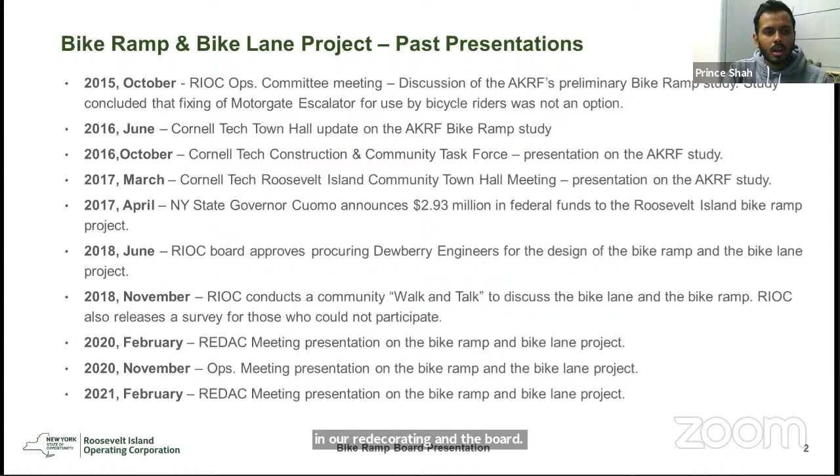This is the Walk and Talk that we had done. I try to focus on every project by zooming out and zooming in. Zooming in, what's RIOC doing, or what is Roosevelt Island doing? But zooming out, what is New York City doing, and what are all our 5 boroughs doing?

It's very important to note that with the New York City DOT's Green Wave plan, there's already a plan to expand the bike lanes everywhere around us, around Roosevelt Island. There's an expansion of the network of bike lanes in Astoria, in Brooklyn, even in the Bronx. I don't think the Bronx portion is part of the Green Wave plan, but it all connects eventually to Roosevelt Island. In 2020, Mayor de Blasio announced plans to construct 26.9 miles of bike lane.

In 2021, recently, the mayor announced Bridges for the People to connect and create bike lanes on the Brooklyn and Queensborough Bridge. So around us, zooming out, all 5 boroughs are concentrating on bike lanes, and more so making the bike lane safer, not just creating a lane that isn't designed. All of these are designed lanes.

What I don't mention here, and I think what's evident since last year in the pandemic, is that biking activities in every borough have increased. You might have heard how you couldn't find helmets, you couldn't even find bikes last year.

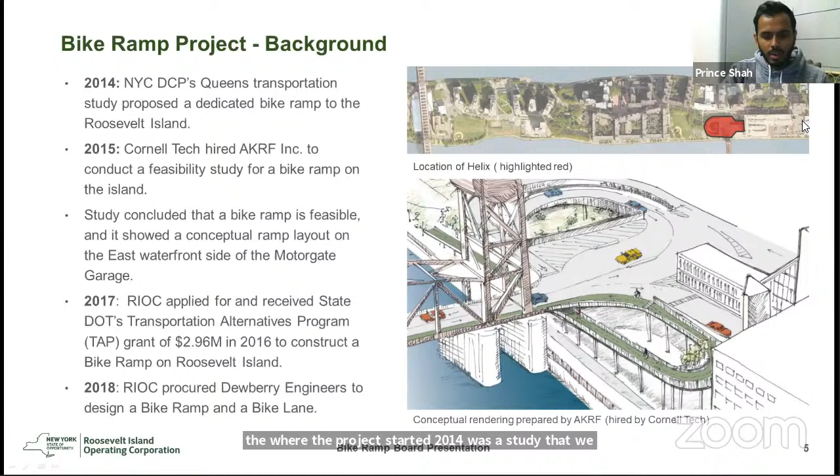So that being said, I'm going to go through the background quickly. I've talked about where the project started: 2014 was a study, then we did a feasibility study, and then we hired Dewberry engineers for the project. Budget is 4 million: 2.96 comes from the TAP grant, and the RIOC match is 1.04 million. The goal of the project is, again, a safe bike ramp.

It has to meet all the DOT guidelines. It has to meet the AASHTO guidelines. It has to create a safe connection that connects the Roosevelt Island Bridge, connects the bike lane, and keeps bicyclists away from the Main Street corridor of vehicular activities. On top of all of this, it has to provide—not so much the bike ramp, but the bike lane, which I'll talk about briefly—a safe pedestrian walkway as well.

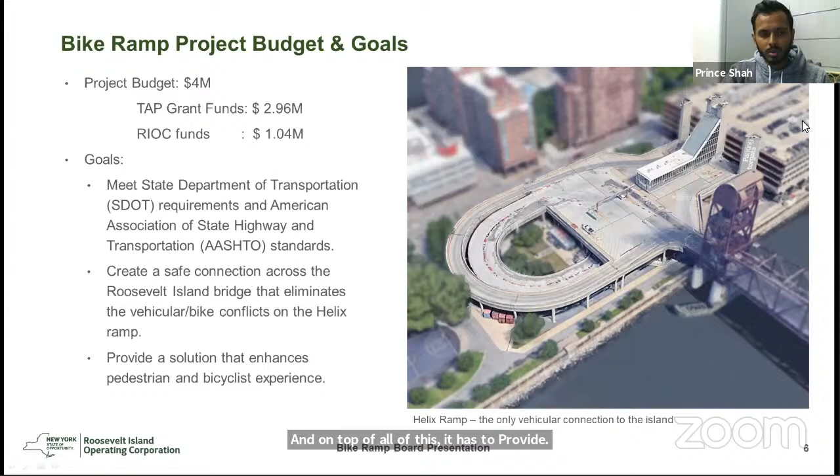Just looking at the bike ramp, we've done a couple of configuration studies, looked at the AKRF study, and that's kind of where we ended up. I'll fly through some of them, but looking at the AKRF study for the bike ramp, we realized AKRF had done a conceptual study—they didn't have actual surveys. That was not their scope of work. Their scope was not to survey the ramp or the area, but to look conceptually at what can fit in this zone, and whether it could meet the guidelines.

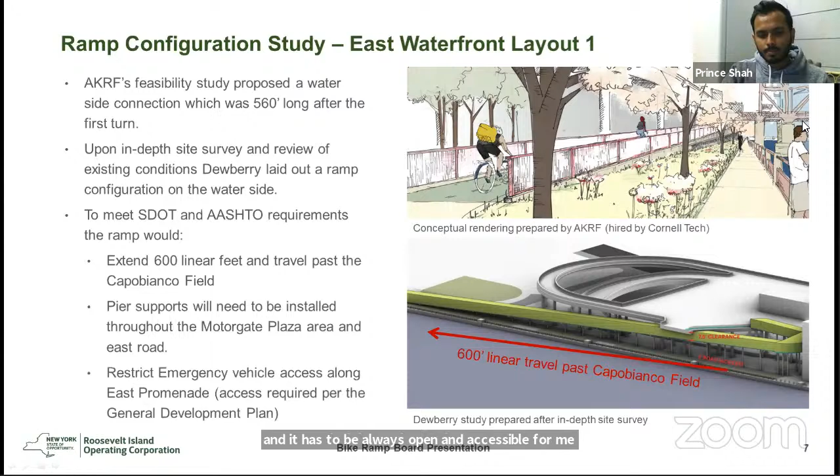What they had done—when we did our own surveys on site, we looked at the geometric dimensions of the ramp. We received some as-built drawings from the original designer of the ramp. We realized AKRF's layout did not work and did not meet some of the clearances. On top of that, it took out a portion of our East Promenade, which has to be used for emergency service and must always be open and accessible. So we looked at a couple other studies. Most of these either did not meet the AASHTO guidelines or did not meet our funding guidelines, which required us to create a bike ramp.

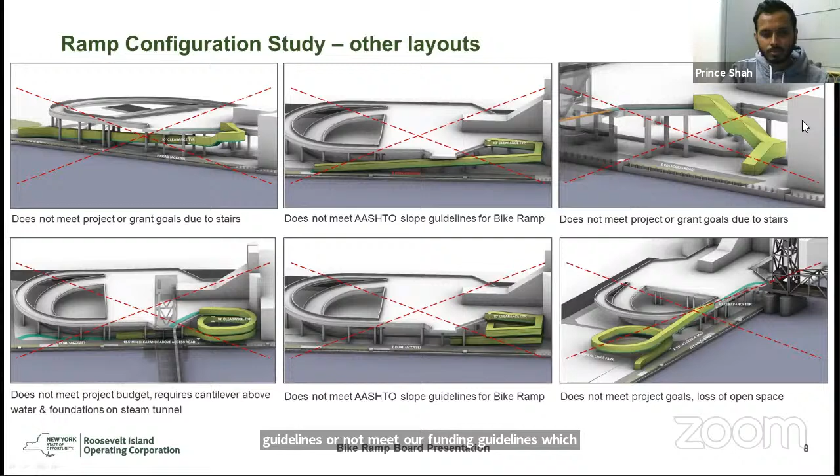So we looked at a couple other studies. One of the studies was creating a bike ramp on East Waterfront. This layout of the bike ramp was taking away from a public space, which is the public plaza space, the stairs right here, and we were going to put a bike ramp in that area.

Zooming out again, looking at the larger capital goals for the island and this area, we realized that if we put a bike ramp here, A, it creates a dark, dingy space. B, it restricts the area from any future development. You take out this public space, put in this concrete bike ramp structure, and it'll make the Motorgate atrium, used for arts and other public activities, unusable.

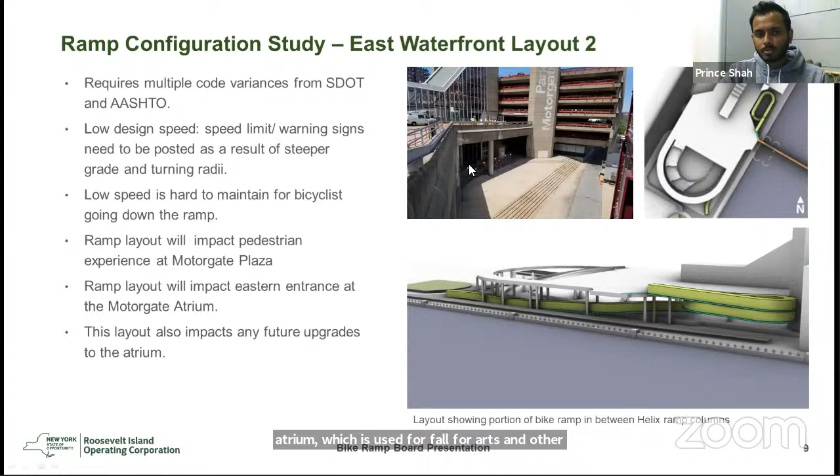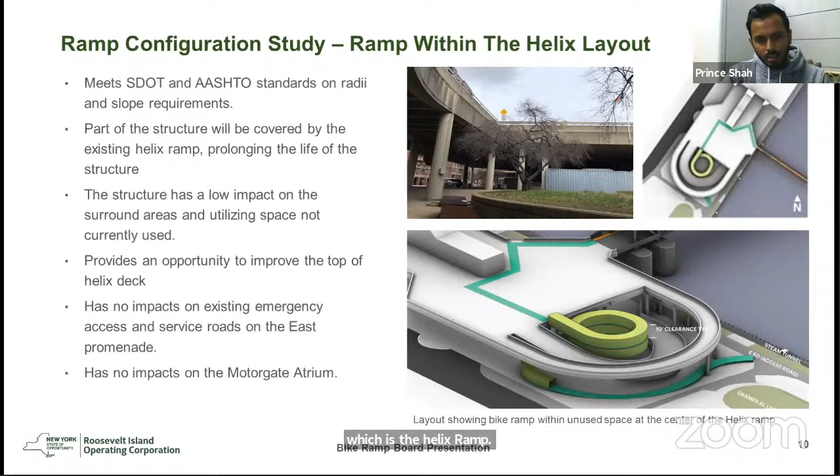So we moved on from that layout, and there were a lot of further studies. I'm just trying to be brief here. We looked at this layout, the Helix ramp, a ramp within the Helix vehicular bridge. Looking at this Helix within a Helix idea, what's evident is this layout will not affect our Motorgate atrium, it will not affect the public space, and it will only affect the areas marked here in blue.

Eventually, you'll see in further slides, there's a net gain of public space. There is more usable public space than there would have been with the ramp on the East Promenade.

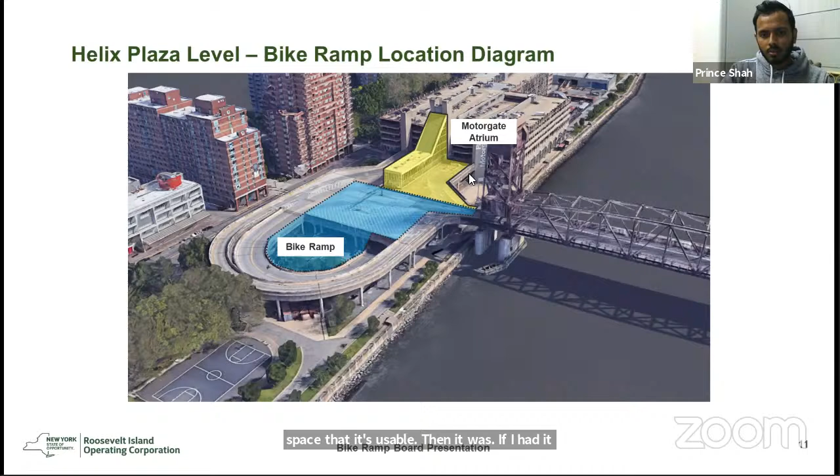Going back to the ground level, you'll see that the area of the Helix within Helix is within the blue zone, away from the usable public space of the Farmers Market, the Motorgate atrium, and the area that's very active on Saturdays during Farmers Market, and even on weekdays when people are going into the garage or to Food Town, etc.

Looking at this layout of existing conditions at the ground level, we have this unused space currently used as a RIOC storage area with storage containers, and also used for parking during blizzards when we ask people to get off the main street and park within this area.

There are also some crabapple trees within this area that have significant root rot and are near the end of their life cycle. They're at the edge of the retaining wall that needs to be removed in order to have the columns of the new bike ramp.

We looked at transplanting these trees, but because of their age, they're almost guaranteed not to survive. So instead, we're planting six other trees within this area to make it more accessible to the public. You'll see that in the next slide.

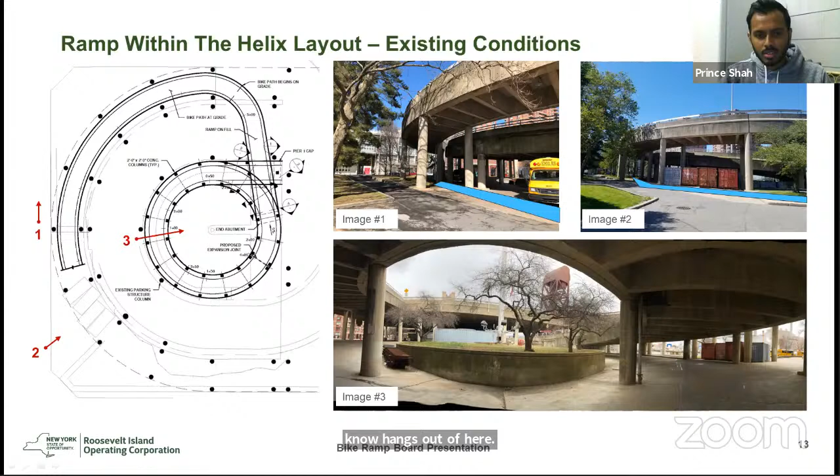We see this area as a plus to the project, the community, and the green space of the island, where we're expanding the green space. We're introducing pink flowering trees that will be healthy and last longer. We're making sure the culture of the island's cherry blossom festival, the pink flowering trees, is still intact, and you'll see that rhythm continue in the next couple of slides.

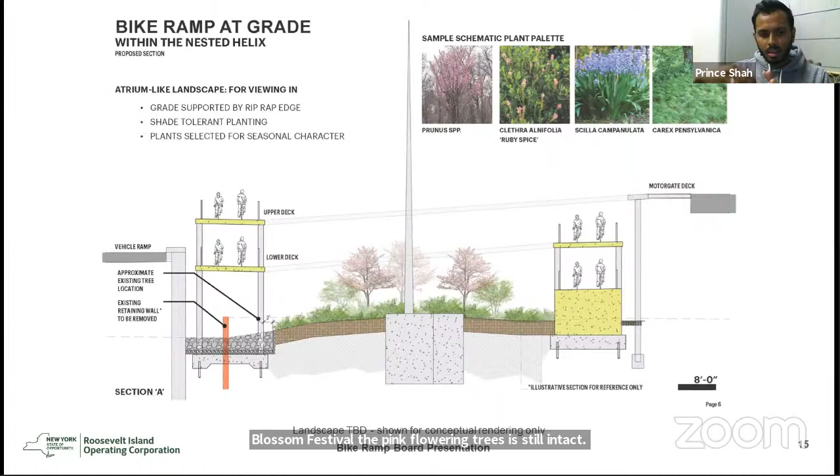Now zooming out again, you see there's a Roosevelt Island Bridge where Paul and some other community members are actively working on getting a bike lane, or a safer bike lane. You'll see that the bike lane, as it comes towards Roosevelt Island Bridge, turns into this dedicated bike ramp, really reconnecting to the idea of the bridge connection, where Paul and other community members are creating that safer bridge connection.

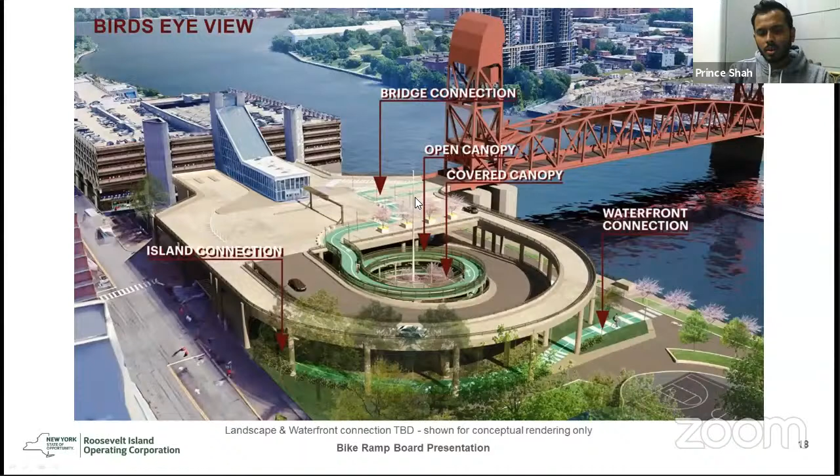Past the Roosevelt Island Bridge, this project aims to create a safer bike lane connection on the bridge plaza itself, the Helix Plaza. You'll see the juxtaposition of open canopy versus covered canopy. As you're coming onto the ramp and going down, I'll walk you through that journey - you'll see the connection between biking under a canopy versus looking at these green trees, the water, the future bike lane, and really reconnecting to the island and understanding its culture as you're going in.

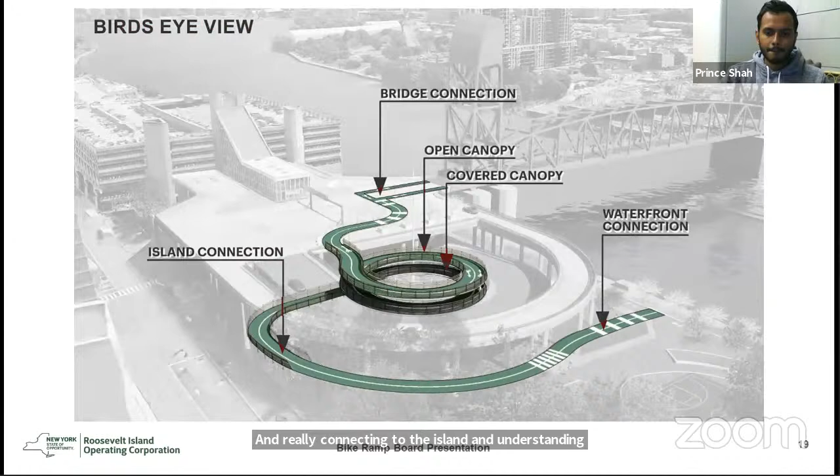So now, walking you through the journey of the project. On the plaza level, we have the dedicated, marked bike lane that leads into the bike ramp. For the purposes of illustration, we're not showing the stop signs and bike-only or bike-turn-left signs, but there is another traffic study performed by the traffic engineers, and there is a whole traffic layout.

Something to note, this is a DOT project, it has to be DOT approved. So there are DOT standard safety precautions and measures on the whole project.

As the biker approaches the bridge, there'll be a stop sign that will stop them, and there will be rumble strips along the way as the biker goes towards the bridge. So they won't be able to speed down towards the bridge or speed out of the bridge and not be able to stop. The rumble strips really calm the traffic and work towards slowing down the biker as they come towards the stop.

As you go down the ramp, you'll see connections of the cherry trees, or the pink flowering trees. Our idea and goal was to really create a softer edge as you're coming onto the Helix.

This is our first introduction of the island, right? There's an introduction at the tram, which is amazing. There's an introduction at the ferry. There's an introduction at the subway. But for vehicular traffic, for bike traffic, for pedestrian traffic coming from Long Island City, this is our introduction. So this project aims to start really recreating and rebuilding the introduction to the island as you're approaching it onto the bridge.

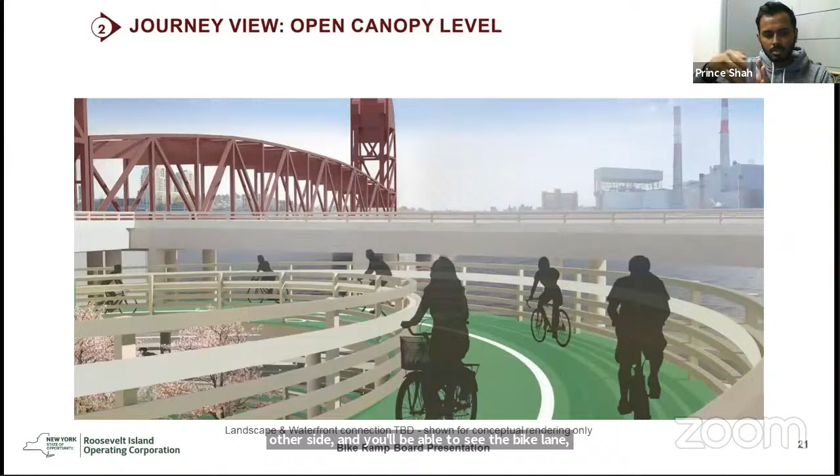Going down, you're going at a slower rate, and you're really connecting to all these landscape elements of the island. As you come down, you will see railings on either side that really stop the bikers from going out of the bike lane or bike ramp and off to the sides. There's also a landscape edge within that zone to create a softer edge and also a safer lane.

As you come down on the ramp and approach this area, the rest of the bike ramp turns into essentially the bike lane, and it is all at grade level. You'll see that all of this is almost at grade level, and there are multiple rumble strips to ensure that you slow down and you're not just spinning out of the bike ramp and onto the bike lane.

So you're really slowing down, and there's a slight descent as you approach the bike lane, with a nice, soft curve that brings you onto the bike lane.

From the outside, if you're walking on the sidewalk, you see that there's a minimal impact of this bike ramp onto the island and onto the quality of the island. On top of that, we're actually adding a lot of green space, the green space I was talking about before.

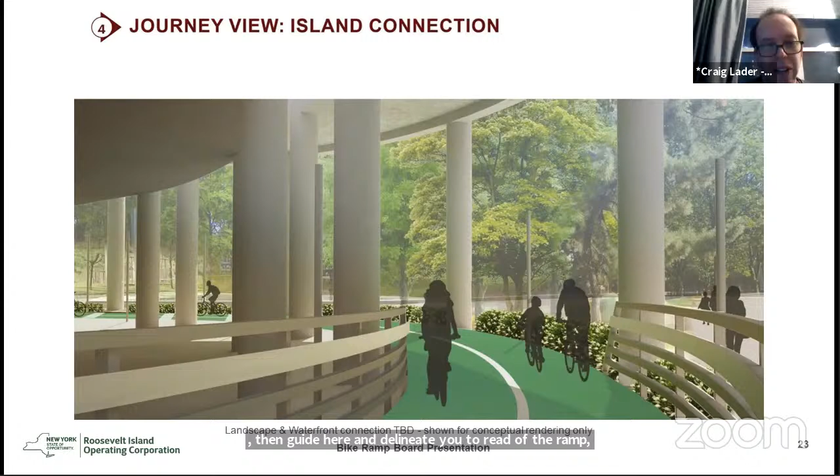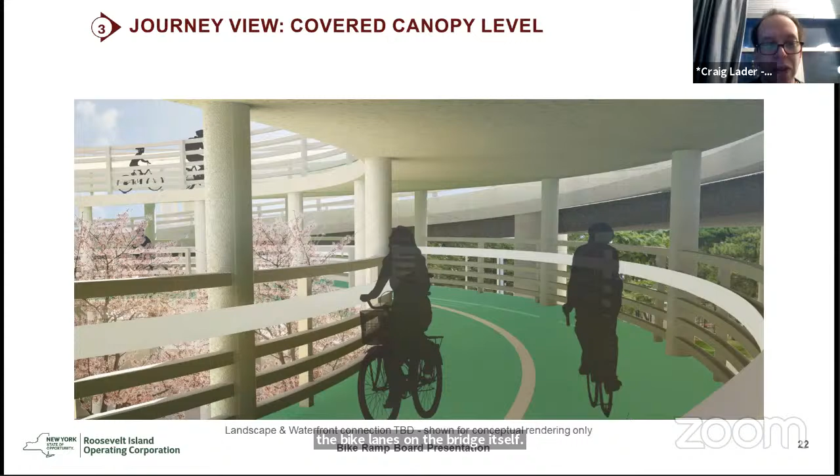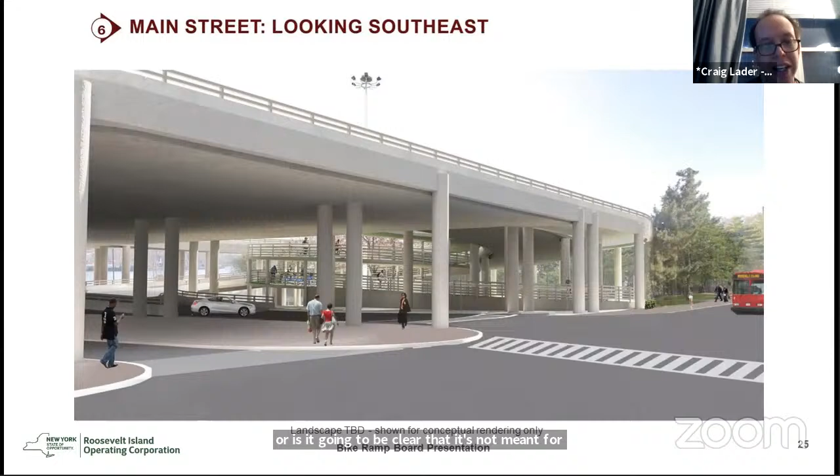All right, great. Yeah, I was just thinking how at night it could be particularly dark under there, so that sounds good. And just, from a network connectivity standpoint, I know there's progress being made on the bike lanes on the bridge itself. I assume it's just a matter of how the paint directs people into the right lanes and makes sure pedestrians are separated from cyclists, not on the ramp, but on the bridge, because pedestrians are... is it going to be clear that it's not meant for pedestrians? Because I can't imagine it would be safe for a pedestrian who doesn't see a bike coming down the ramp, circling around.

Yeah, let me see if it shows up in this rendering. One of the goals of the project was to really clarify the pedestrian access way onto the island. So right now, the pedestrian way is actually through an entrance here. Before working at RIOC, I'd been to the island for a very long time—I used to hang out here in high school—and I never knew there was an entranceway into the Motorgate, because I never saw it.

There's no proper signage there, no proper pathway leading onto the atrium. So this project kind of goes hand in hand with other capital projects we're currently looking at, in terms of how we can improve access and visibility going into the atrium. So part of this project involves improving all the pathways. There are actually new pathways that lead you onto this area, new curb cuts, new access ways to ensure you actually see there's an entranceway here, and then there's an elevator inside that takes you down.

And there will be signage on this side that shows you this is for bicycles only, and this is for cars and such. All right, great.

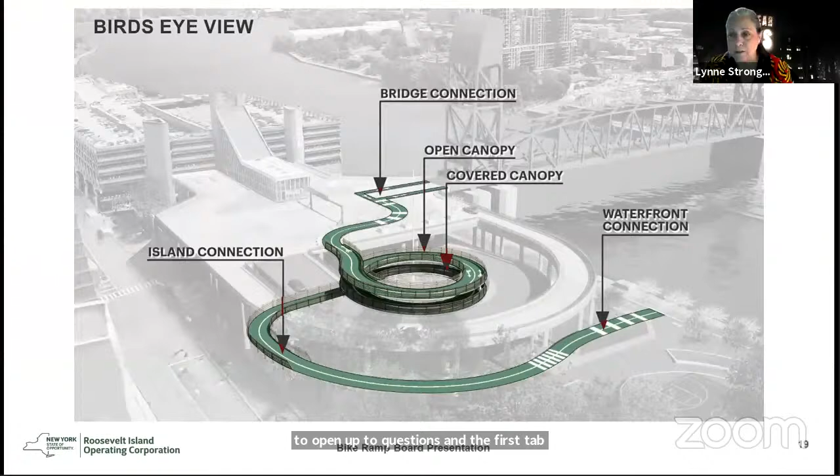Great, thank you so much for this presentation—I thought it was very helpful. I have a quick question and then maybe one or two that aren't as quick. When you say DOT approval, am I right to assume that's the state DOT?

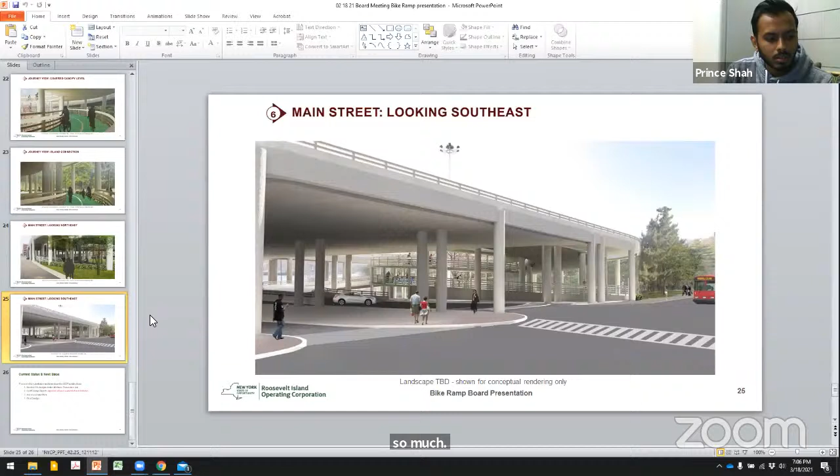Yes. Great. And then do you mind going to slide 25, please? Yep. So am I correct that the ramp is hitting where the current Citi Bike stand is? And if so...

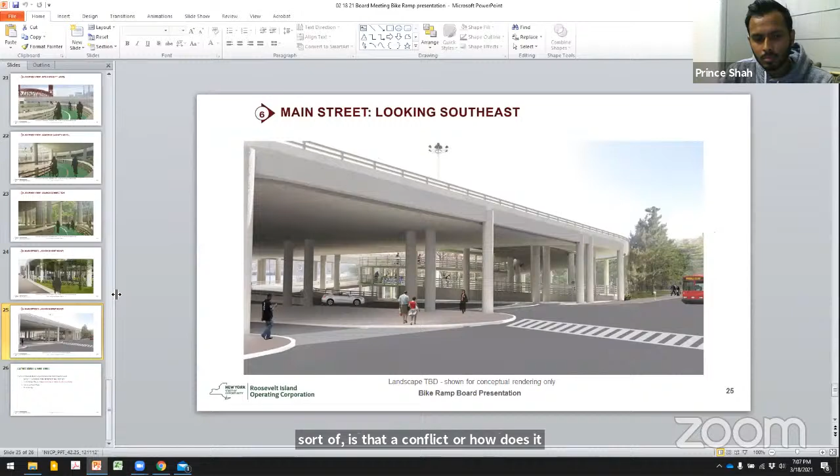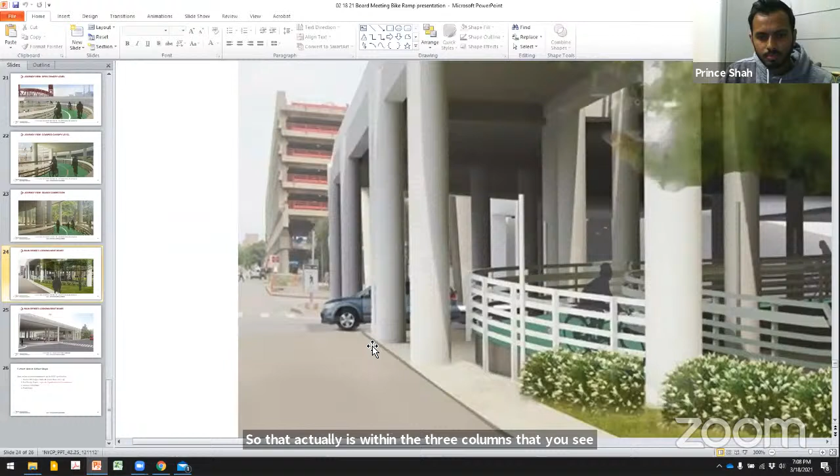How does that relate spatially to where the Citi Bike rack is? When we installed the Citi Bike in that area, we discussed with Citi Bike that this bike ramp layout was one of the options we were exploring. At that time we had only developed a schematic like what you see here. So they are aware this area does impact Citi Bike, but there's still enough space. Let me see—where's the sidewalk? There, okay. So there is still space behind the bike ramp that is accessible. The Citi Bike space is between this column, column one, and I think column three in the back, so it's within these three columns. It doesn't come past the inside column, so there's still space for Citi Bike here.

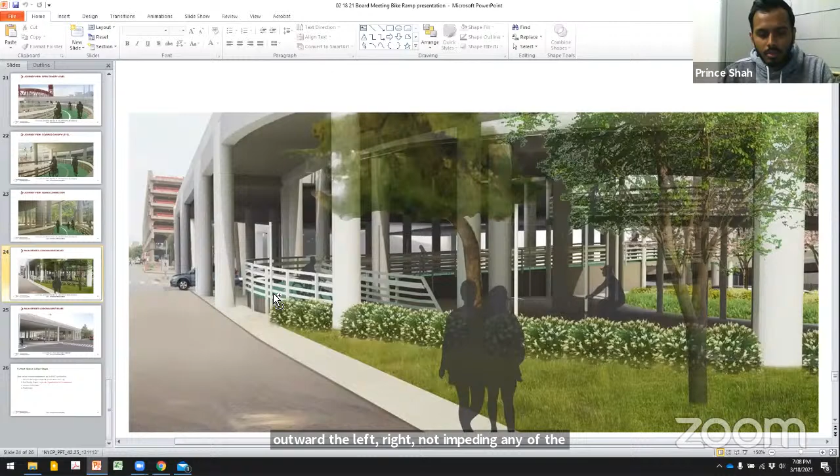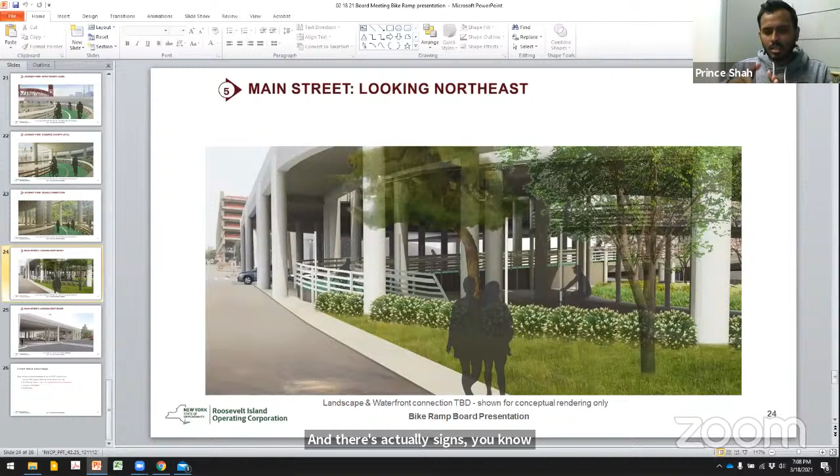We had discussed this with Citi Bike, so they know that if they need to make adjustments, they're aware they might have to move the Citi Bike inward or outward, or left or right, without impeding any sidewalk space. The reason for having the Citi Bike where it is now was to create this culture where you can take the Citi Bike—there are signs pointing toward this pathway right now to bring bikers toward the east promenade. Does that clarify the answer? Sorry, I kind of mumbled. Yeah, it does clarify somewhat, but do I take from your answer that it's possible the Citi Bike stand could get moved into Main Street, into the actual street, if it were moved?

No, inward or outward within the same area inside the sidewalk, not onto Main Street or off the sidewalk—they'll still be within the same zone. When I say inward and outward, I mean really 10 or 15 feet inside, or left or right, not onto the sidewalk or onto the street.

Because the last thing we want to do is take away the street in that area. It's a very busy space.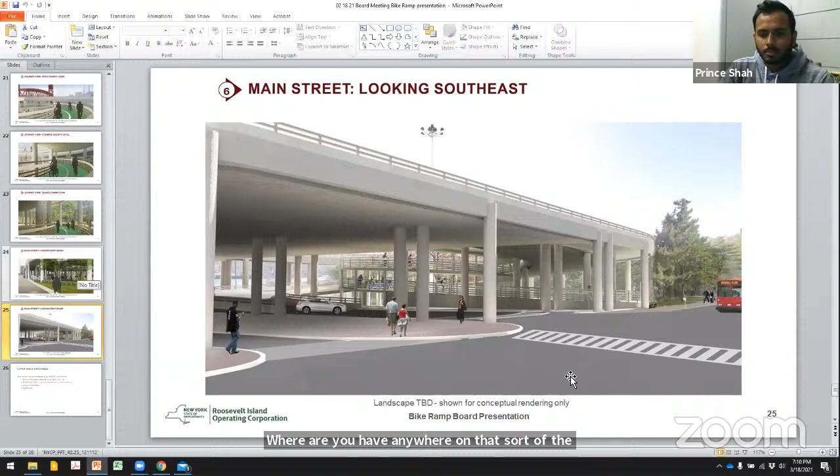That was going to be my last question, forgive me if you covered it in the presentation: with respect to adding a bike lane on Main Street, I saw your survey responses. Where are you on that discussion? This ramp leads right to Main Street, which could arguably make it a good candidate for a bike lane, though I know it would be a hot topic for debate. Is that something RIOC is contemplating? Yes, what we are contemplating, and the goal of this project, is to take bikes away from Main Street, not onto Main Street.

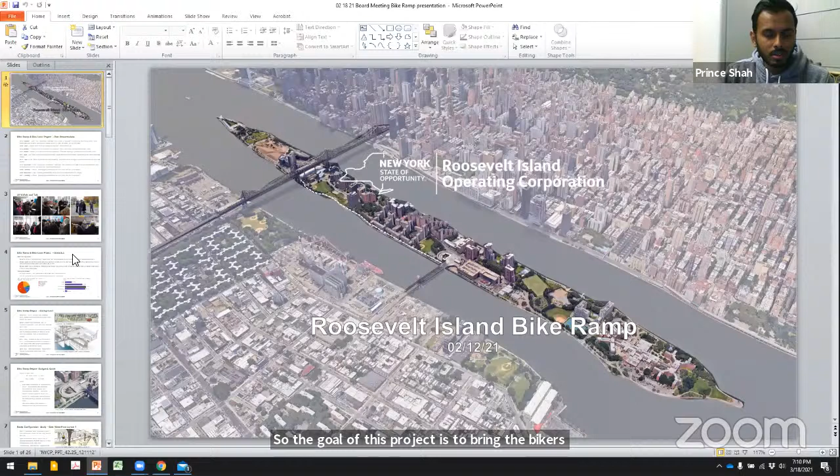So what you will see here is our East Promenade, and this is the West Promenade facing Manhattan, and then we have Main Street on the island. The goal of the project is to create an East Promenade bike lane corridor away from Main Street. We want to make sure bikers come onto the East Promenade, where there's a wider space for bikers to ride and pedestrians to walk. So you'll see bikers come onto the East Promenade and not onto Main Street, which is here. This is in line with the 2014 Queens Transportation Study, which also suggested bringing the bike lane onto the East Promenade.

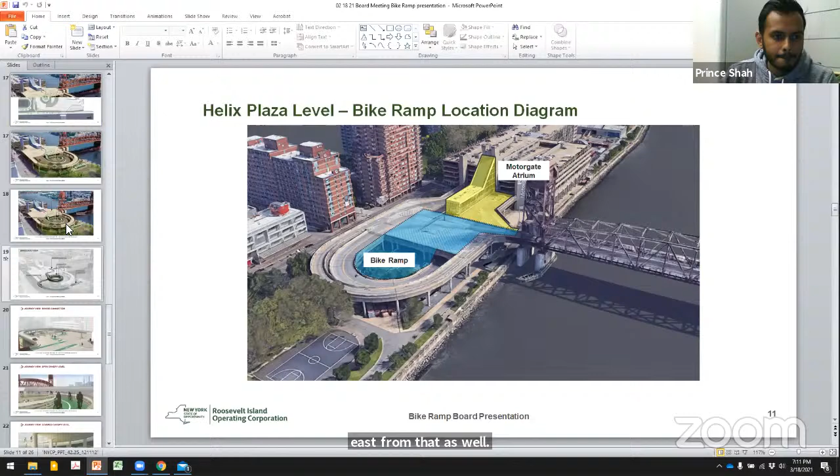Could I see the visual of how the bike ramp connects to guide people to the East Promenade? As you're coming down the bike ramp, you're slowed down by rumble strips, and this rendering almost stops where the bike ramp ends, but where it ends is where the bike lane begins. So this pathway turns into the bike lane.

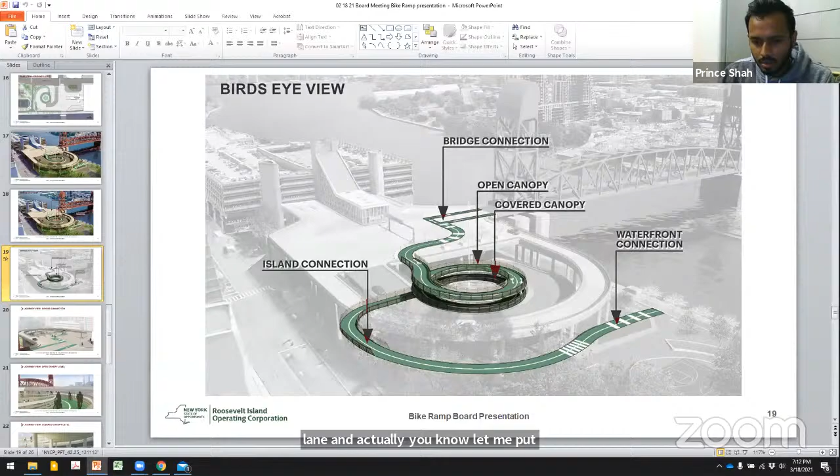There's another project too. If you go to RIOC's website and look at the REDAC February 12 meeting, it's almost an hour or two-hour presentation that talks about the whole project and how it fits into the capital goals of the agency, with the goal being to connect to every public space on the island. You'll see the bike lane. Let me put up that graphic quickly, give me a second.

While you're pulling that up, I don't know if you said what the timeline is for when you'd like this completed. I know with DOT approval that makes it hard to say, but do you have a rough idea of the timeline?

Yes, construction will begin in fall of 2022 for the bike ramp and bike lane, and the project is expected to take 2 years, so it will be constructed by 2024. I'll say that's a little disappointing, 2 years, but I know that's probably not in your control. Yeah, but it's DOT - when we found out the timeline of how long the project takes to get approved, it was kind of shocking to me how long it takes. But that's because we have federal funding and state review and such. Let me just show you this graphic, and this will help.

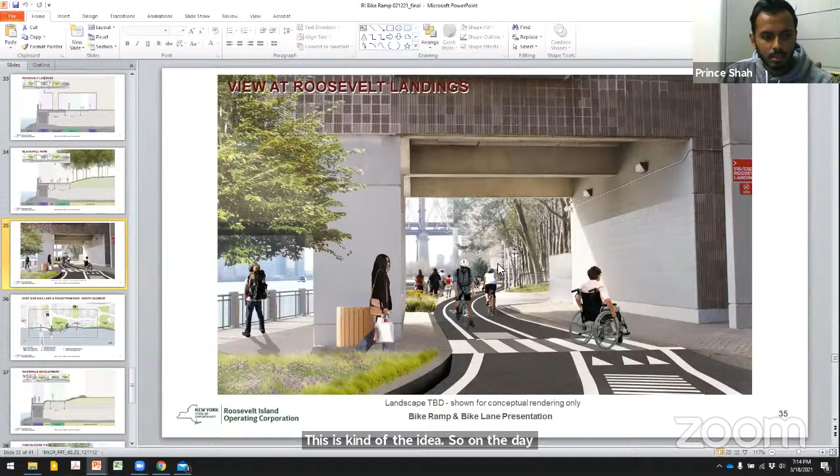Sure, I think everyone here might have other questions too. You'll see the bike ramp on the right side of the screen brings you onto the bike lane, and the bike lane runs along the East Promenade. The goal is to create a pedestrian path so you can take your bike and walk it to Main Street along the breezeways on Roosevelt Landings or any public crossways, but the rest is the clear bike lane. This full presentation is on the website, but to show quick graphics - there'll be a bike lane on the promenade connecting you to the rest of the East Promenade, and eventually to the road leading to South Point Park and Four Freedoms Park.

Great, thank you, I think this is a really important and good idea. Thanks for the presentation.

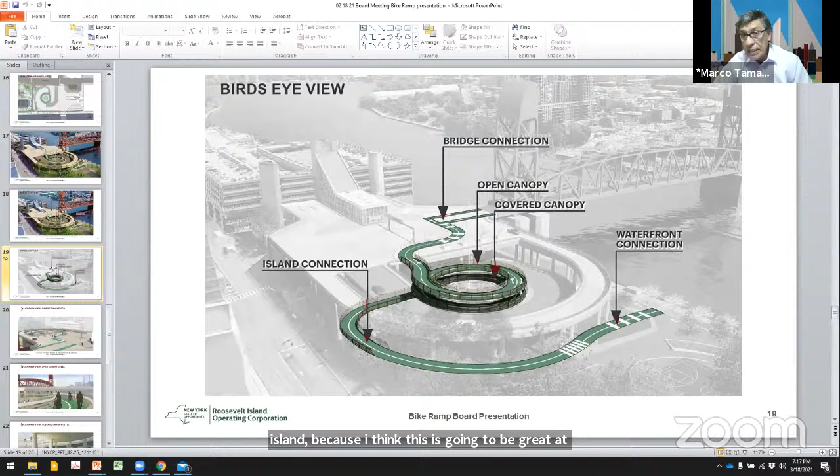I think they deserve it, we have to promote exercise. I think it's great, the whole system is great. The whole island offers these opportunities, and we have to take advantage of that. The only thing I'm going to say is thank you, thank you. You did a wonderful job, and I hope that you include more projection in the island, because I think this is one of the great assets that we can have.

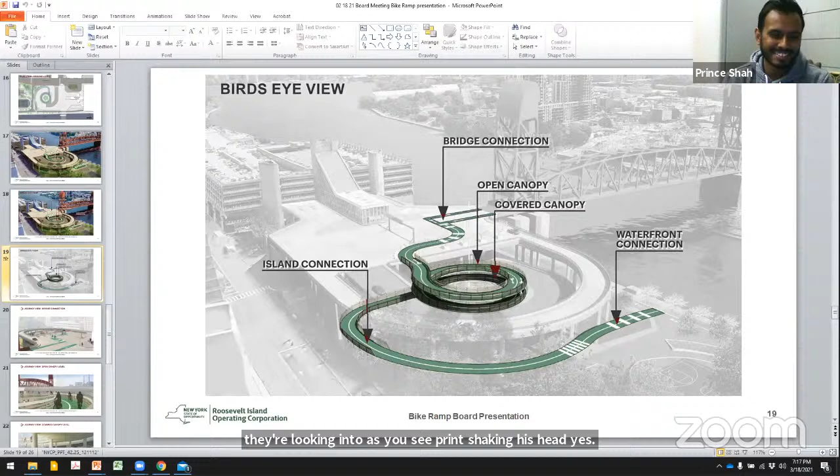Can you hear me? Yes. Oh, okay, great. Thank you, Lynn. I have a couple of comments and also a couple of questions.

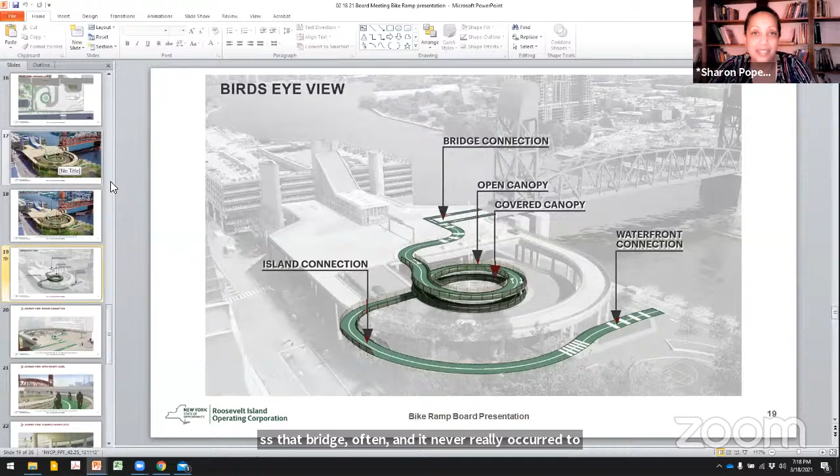First of all, Paul Krikler, thank you, thank you, thank you, and everyone else who is involved in trying to have a flat surface on the Roosevelt Island Bridge. I'm in awe of your efforts, I really appreciate it a great deal. I have biked across that bridge often, and it never really occurred to me, I'll be perfectly honest with you, to move in the direction that you have in trying to get something flat on the surface of the Roosevelt Island Bridge. I just didn't think there was anything that could be done. So I really want to tell you that I'm watching you, I'm praying for your success, and thank you so much for your efforts.

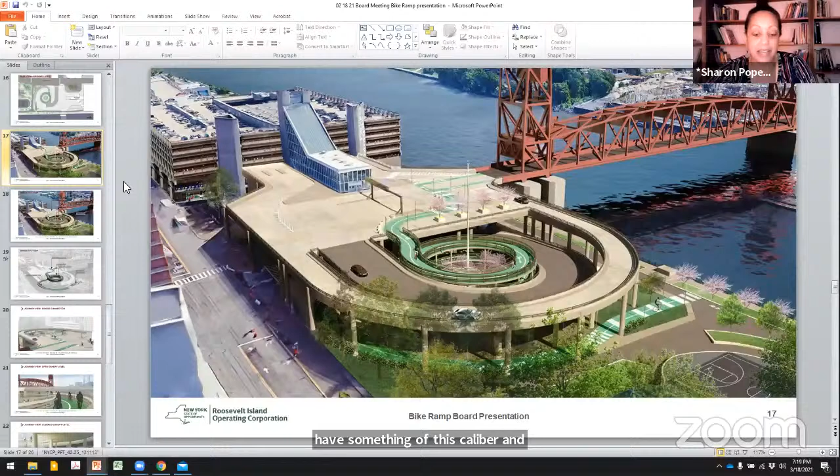And to Jane Swanson, Cornell Tech, as well as RIAC, this is a wonderful, wonderful presentation. I just cannot believe that Roosevelt Island is going to have something of this caliber. I'd like to echo and repeat Marco's comments and Billy's comments as well. This is absolutely a beautiful presentation, visually beautiful. I love the minimal impact that it will have on Roosevelt Island, and I really want to thank RIAC for moving forward with this, as well as Jane Swanson and Cornell Tech for their efforts in moving this forward. Thank you, thank you, thank you.

Two questions. In the presentation, I am really happy that underneath the bridge, underneath the helix, and at the Roosevelt Island Bridge level, that space is being reactivated, if you will. I love the trees, especially on the upper level, and of course on the lower level as well. What I did not see was seating, and I am thinking that seating should be incorporated to further reinvigorate that area on the upper level as well as on the lower level. I could really see people taking advantage of the seating. So that's my first question.

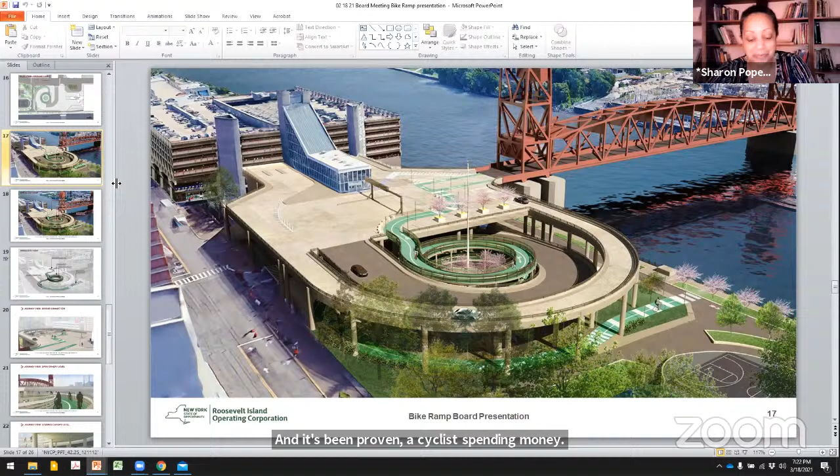Our small businesses need all the help that they can get, and it's been proven that cyclists spend money at small businesses wherever they go. So those are my two questions regarding seating and also regarding enforcement, which I hope there have been discussions about. And that's it. A beautiful, wonderful presentation. Thank you so much, everybody, for all of the efforts put into this project. Two years cannot come around soon enough.

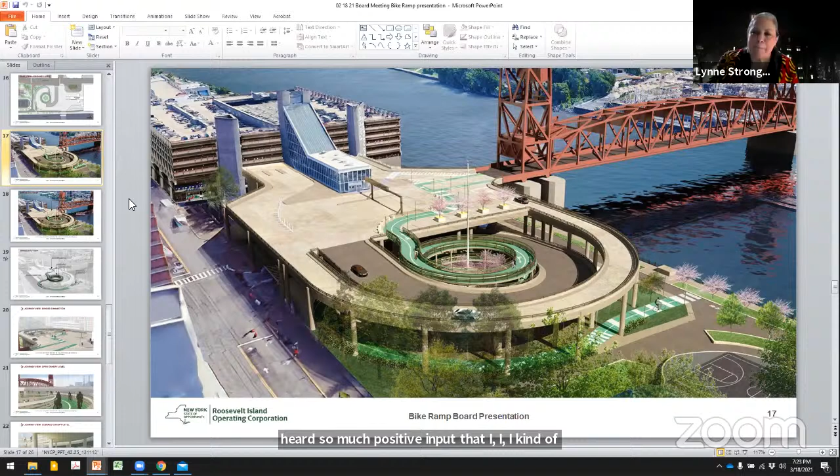Yes, Sharon. Your question number one, I just heard so much positive input that I kind of forgot the two questions, so forgive me. Your question one is regarding seating, and I wholeheartedly agree with you.

When we created this presentation, we didn't stop there. We are still designing this further, and one of the things I've asked our design team is to create seating along the way. The idea was, one of our strongest partners is Bike New York within this area, and they use this kind of zone in the basketball court area to really teach kids how to bike. So what we want to do is create almost a rest stop area, or a node that can connect the Bike New York portion of the program on the island and the bike ramp.

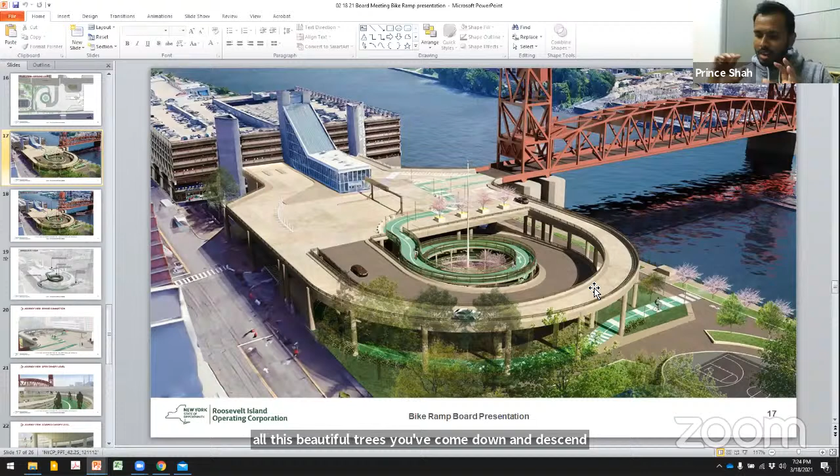With that in mind, we're discussing right now some seating areas right at the edge, at the end of the bike ramp. There'll be some seating areas, there'll be a drinking fountain within the zone to create kind of a resting stop before you get onto the bike lane. Because the idea of the bike lane is to connect all our public spaces. So we want to make sure that you have a spot, after you've seen all these beautiful trees, descended on this beautiful bike ramp, and connected to the water, the trees, the beauty, but now you want to sit down and have water, have a snack. You need a space for that, and that's what we're doing here at the end.

The other point is, at the plaza level there should be seating. But what we are actually exploring is, instead of creating seating at the plaza, creating a space somewhere within the Motorgate atrium that has this beautiful, inviting atmosphere where you can go in. If you actually go in right now and see the architecture, it's beautiful. As someone who studied architecture, and as an architect who kind of geeks into design, I love that space, and we want to create something beautiful in there. So we're working on that.

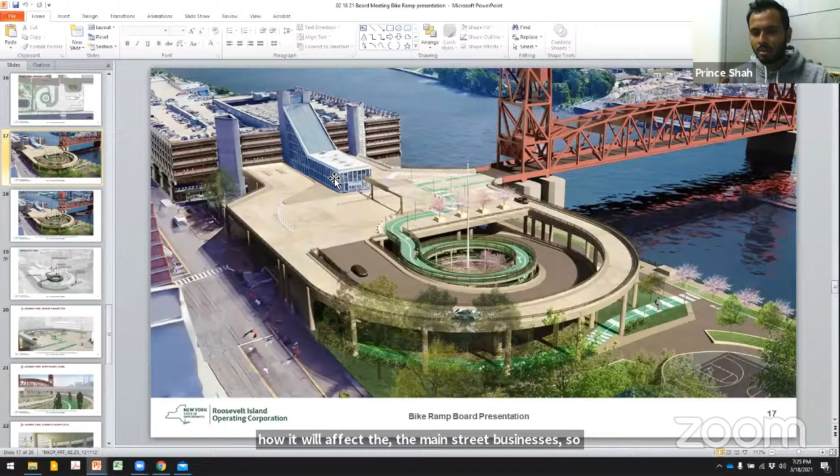The second question you had was, are we forcing bicyclists to go onto the promenade, and how will it affect the Main Street businesses? I can't speak more about the enforcement. Chief Brown is actively working with his team and the bike safety committee, understanding what should be done on Main Street to enforce proper bicycle riding and ensure safe bicycle riding. But the goal of the bike lane project is not to take away from Main Street, it's actually to enhance the experience of going to Main Street.

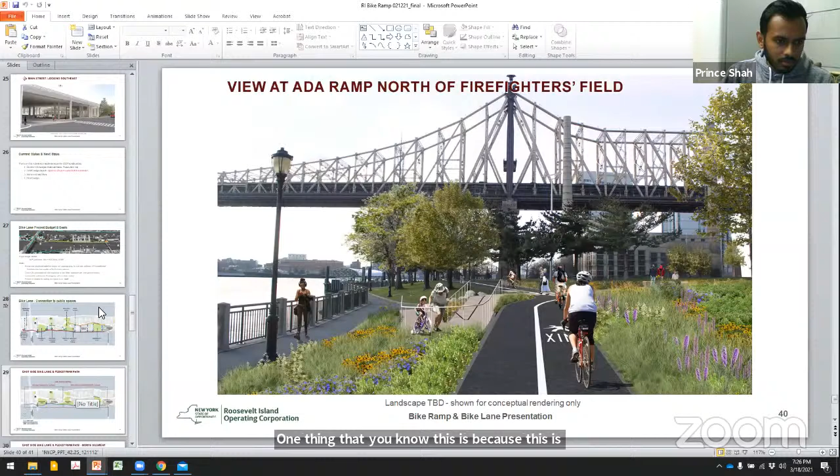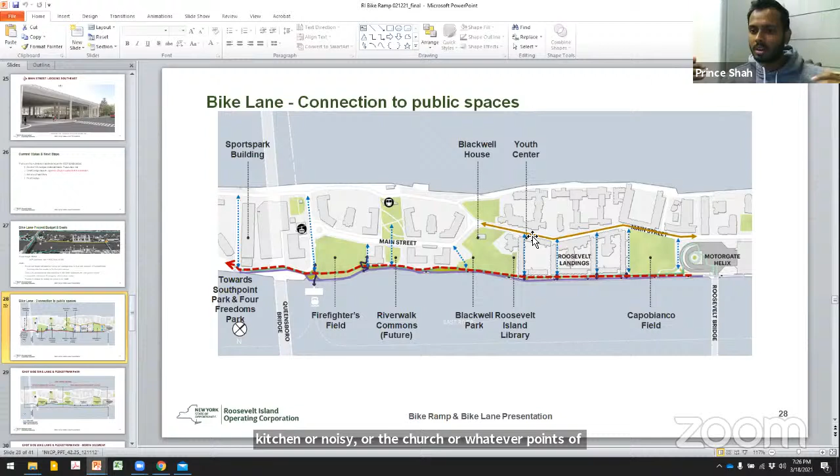This is preliminary graphics we don't normally show, let me see, right here. One of the main concepts of the bike lane is, while it's on East Promenade, you can kind of just travel across and check out all our public spaces. It's really to have signage on all of the lanes so you can come here and say, hey, look, there's China One Kitchen, or Nisi, or the church, or whatever points of interest may be on Main Street. We want to really make sure that people come to our Main Street. We have a beautiful Main Street, and that's the goal of the project.

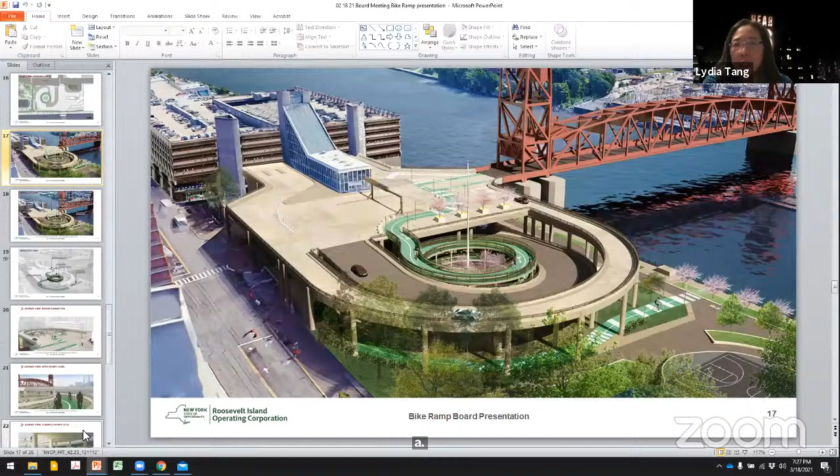My question is, right now around where the helix would be, the RIDA bus is parked there. I'm hoping there's a relocation for the RIDA bus, maybe in the bus lot or wherever. I know there were disabled vehicles parked there, so I was wondering where that was going to be relocated to.

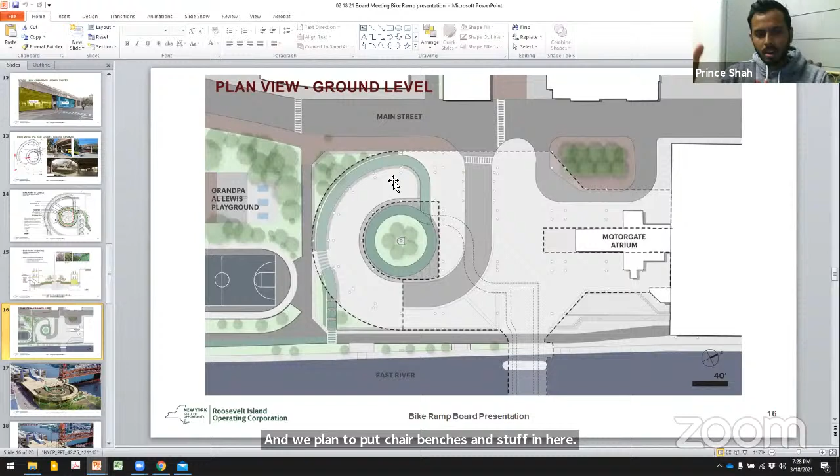We do plan to work with RIDA to figure out a better space for them or where the bus can be parked. There is still space within the ramp, where the bike ramp comes onto the ground level, within the columns where you can't currently park because it's too narrow. So it doesn't take away from the existing open space where RIDA parks, but if this space becomes more publicly usable with benches and such that we don't want parking here, we'll definitely find a better place.

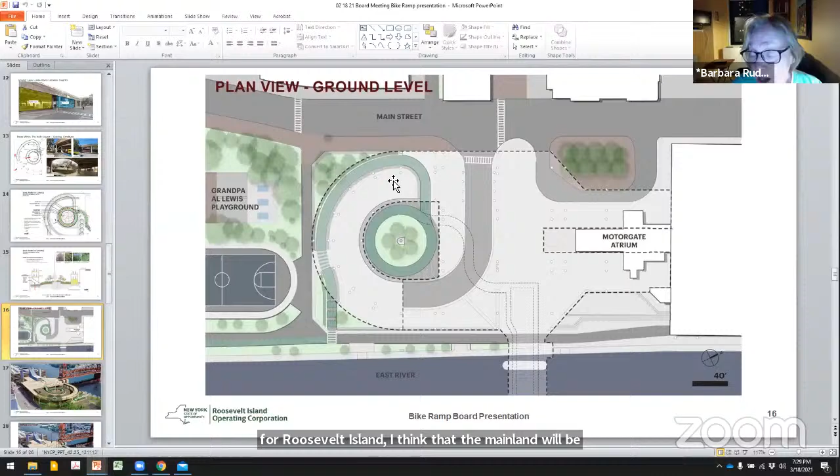Hi, thank you. Lynne, you're not going to be surprised at what I have to say. I feel it's very important that we have a resolution, because things that happen in Roosevelt Island get lost and aren't brought forward. This isn't just for Roosevelt Island; I think the mainland will be using it and enjoying the beauty of it. I was waiting for other people to talk because I'm not a biker and didn't know whether bikers would like it, but everybody seems to. Visually, it's beautiful, and I would very much like a resolution to say that we approve and encourage this project to continue with all the whereases that have been mentioned. Sharon mentioned several, and we can listen to what people say and use all the whereases for it. I hope you agree, Lynne.

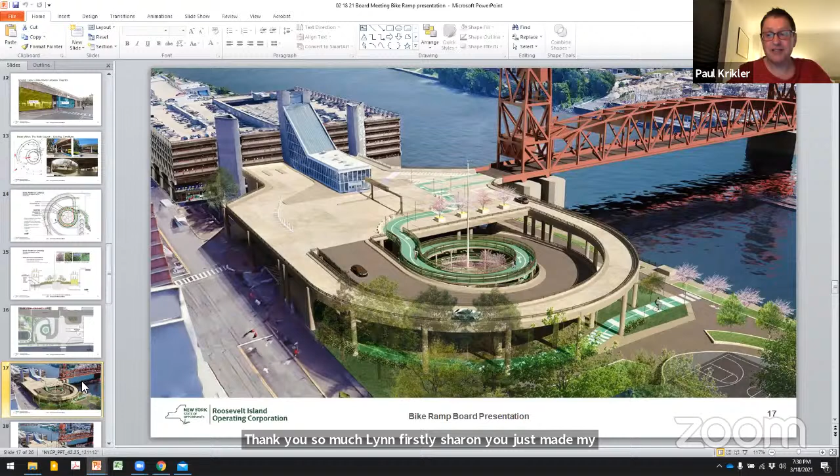Thank you so much, Lynne. Firstly, Sharon, you just made my day. Thank you very much for those kind words. That was very nice, made my week actually. So thank you, I just want to say that I'm hugely in favor of this.

Thank you, Prince, for all the work you've done on this. In particular, what I want to highlight, what I see as the most important thing you said at the start, was how you're designing everything for safety. I get really annoyed when people say words like bicycle helmets and little bells on bicycles and bike safety in the same sentence, because those things don't make people safe on bicycles or for pedestrians either. What makes people safe is good design. If you could show me the slide near the end, where you've got the view from above looking at Main Street and then the two promenades—the aerial view down, I think was near the end.

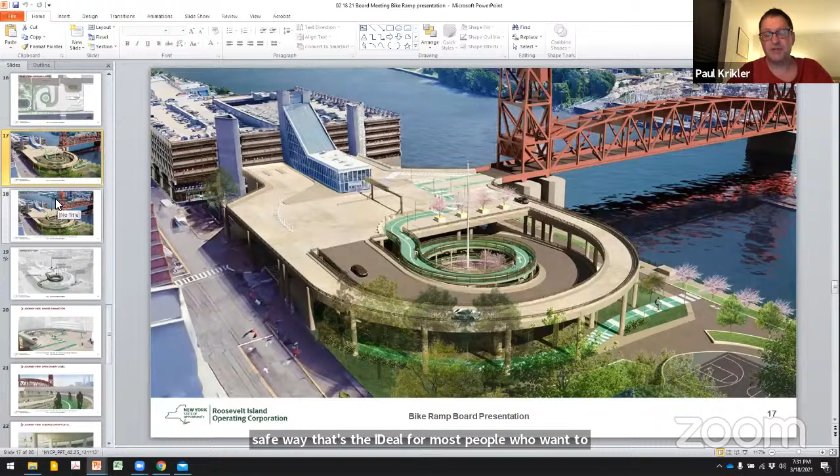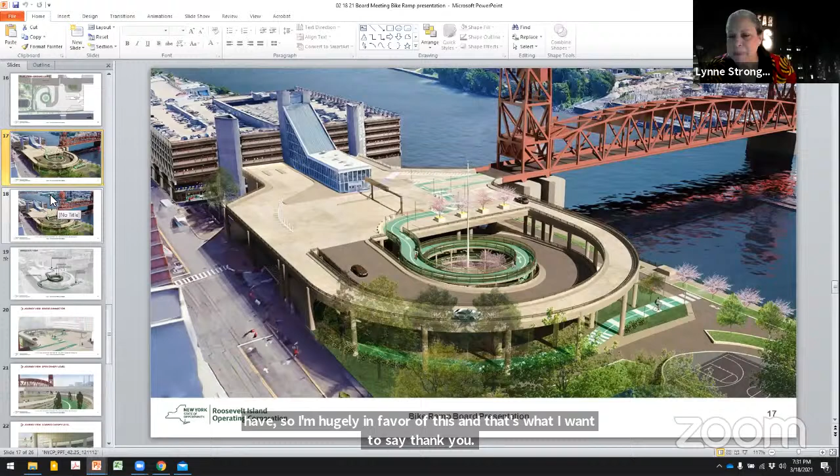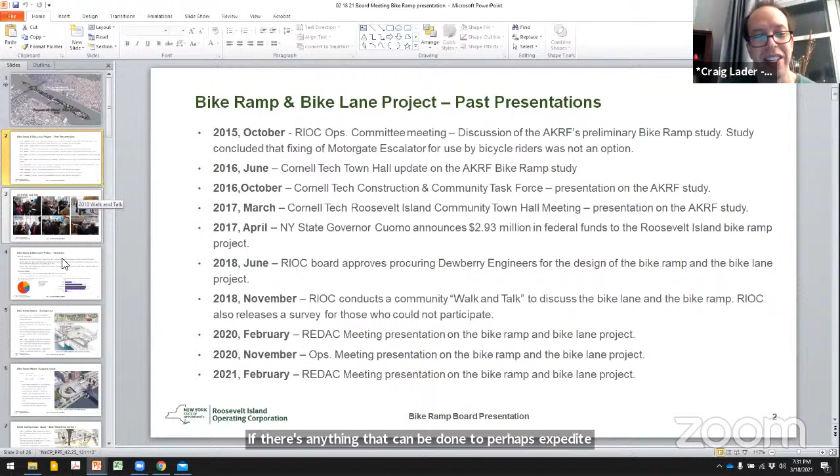Hi again. I just wanted to get a little more information, if possible, about the timeline and the funding source for this. I was curious if there's anything that can be done to perhaps expedite this. I know it's not necessarily the city that has control in this case. Oh, that's right, I did see that. Yeah, so TAP funds, yep.

As an urban planner, transportation planner, I'm very familiar with them. So the project was awarded, I guess, and the funds are in place? That's right. And when is the start date contingent upon?

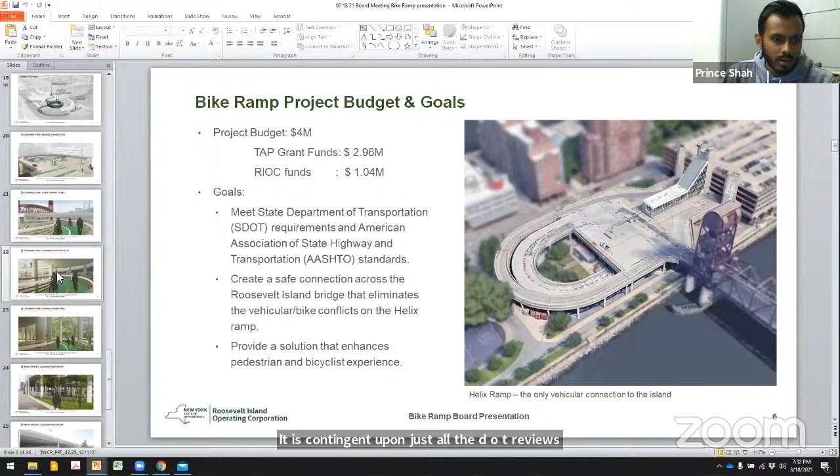The way state DOT sends comments is on a rolling basis, so you never know when it's ending. We reach out to them asking if this is the last comment, and they say no, there's more coming. So we're ready and jumping on this as soon as we get the comments. We received comments, we already resolved them in a week, and now we're just waiting for more.

That's the period where I've asked my team to figure out the fastest we can do on our end before sending it back to DOT. With that schedule, it's still fall of 2022 as the start construction date.

What we want to do now is, once we get the DAD, the design approval documents, approved, our game plan is to reach out to DOT and see how we can prioritize this project to take less time, or work hand in hand with them, since after DAD it becomes more of a straight construction document space, which in my view can be expedited.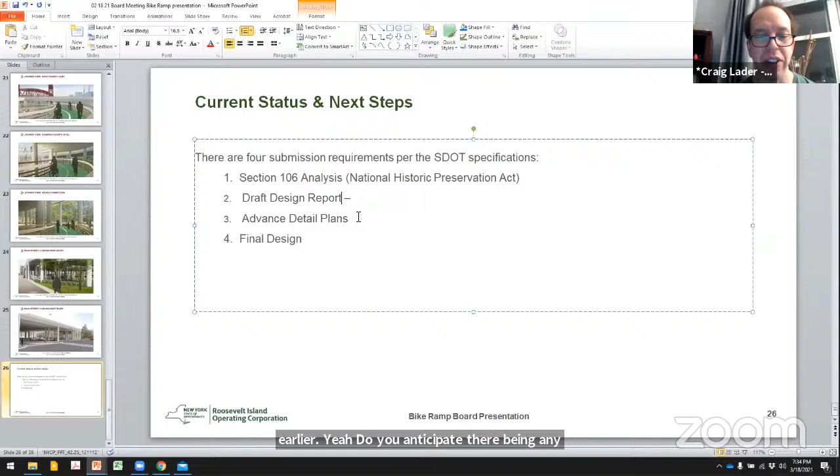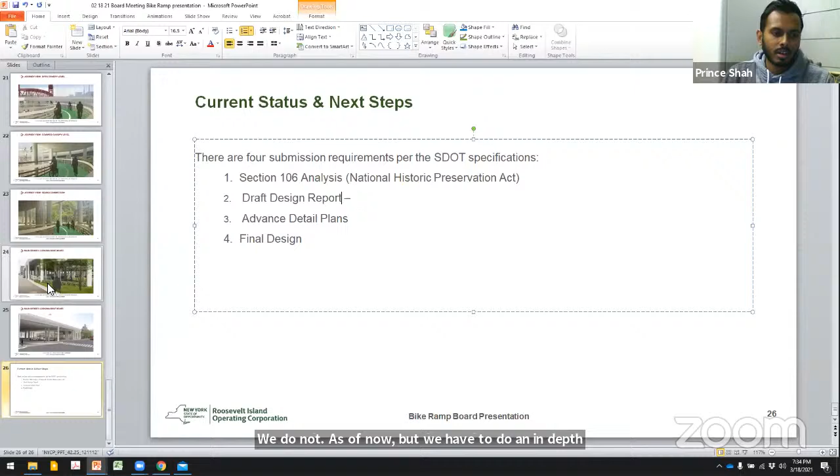Do you anticipate any potential impacts on vehicular traffic during construction? We do not as of now, but we have to do an in-depth logistical analysis of this project to really understand that. If there is vehicular impact during construction, it would be minimal because we're working within the helix.

We're not going to be impacting the ramps on the sides, so it will be minimal. But that's something we can't really confirm yet — we can only find out as we move to the later stages.

Okay, thank you. So Craig, I'd like to propose a joint resolution in support of the bike ramp. How do you feel about that? Yeah, I think that would be fine. I think that would work.

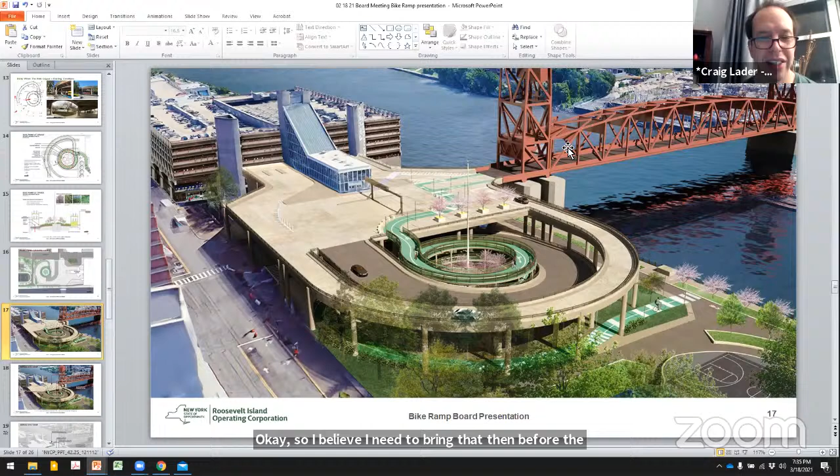Okay, so I believe I need to bring that before the committee and see if we should vote on that. Is that correct? Yes, I guess — is the resolution just in support of the project, or is there other language that should be added? I'll leave that to any members who may want to propose language.

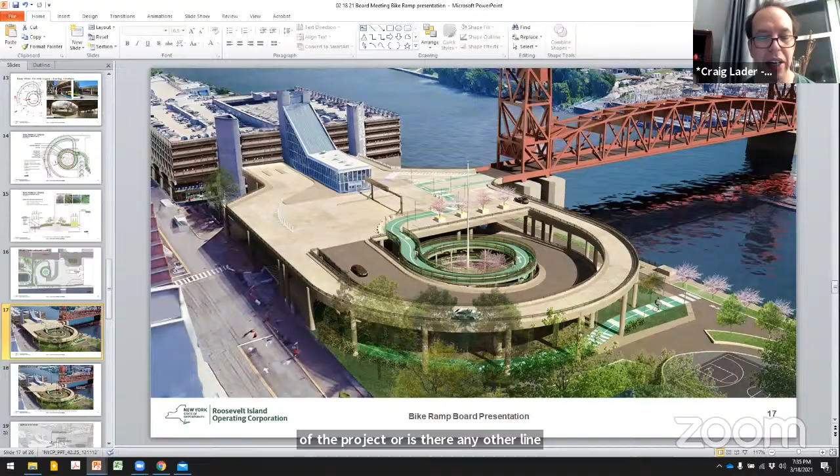I think Billy wanted to make a comment there in terms of the resolution — could you unmute Billy?

Yeah, I'd just like there to be, if there's agreement on this, some language urging our state legislators and DOT to look into ways to expedite projects like this. I'm just shocked hearing construction would begin in fall 2022, and then be a two-year project — that's a lot of time for something to be under construction. The Empire State Building was built in a year and 45 days. I know we're not living in 1930 anymore, but something has to be done about the fact that important transportation infrastructure investments take two years.

That should be unacceptable in 2021. So if that's well taken, I'd like to have some language to that effect, and I'd appreciate if Assemblymember Seawright, perhaps Senator Serrano, would look into ways — whether legislative action or working with the state DOT — to reform whatever requires two years for a project that looks simple to me, at least as simple as this.

Even actually, I would appreciate that. I've been working on this since 2018. Well, you're welcome then. Thank you.

But if that's well taken, Lynn, I don't know — Lynn and Craig? Yeah, no, I don't see that there's a problem. I'm just super excited to see this project moving forward, to see that they responded to the many inputs over these different periods that the community put in.

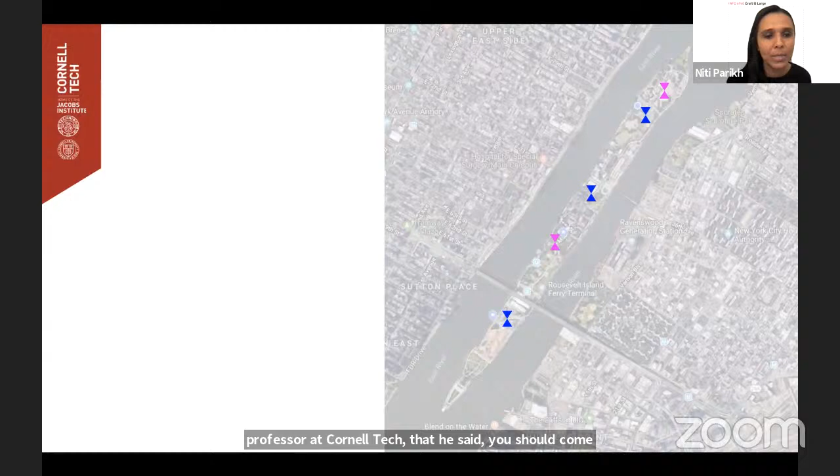Soon we started knowing our neighbors, either at the farmer's market or at the park at our kids' school. Soon after that, I met Open Doors members through my husband, who also is a professor at Cornell Tech. He said, you should come meet these people because they are doing creative projects and you might be able to help them voluntarily with some graphic work. That's how I ended up meeting all the folks at Open Doors.

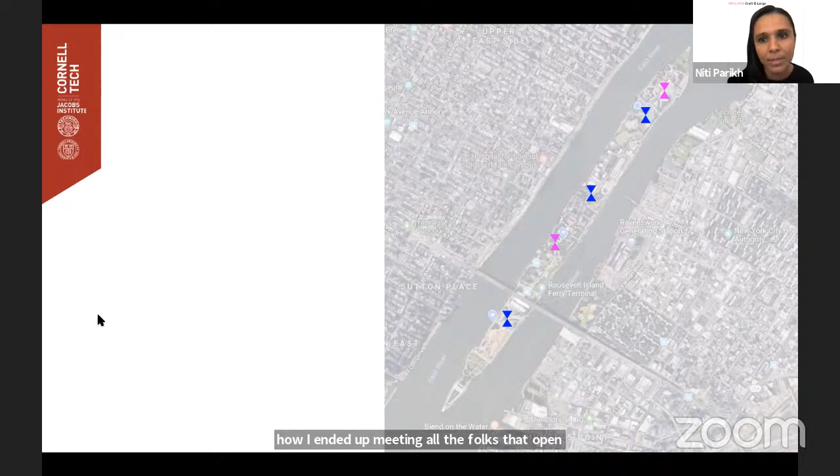It was right away a click of, this is amazing. There are so many creative people around the island, and I wanted to bring Open Doors into Maker Lab to see what happens if we were to allow access for projects and let them use the tools which we had. And what happens when you bring people from the community inside Cornell Tech and give them specific projects, and what happens when our student volunteers come in contact with community and work on that.

Out of that, the project I'm working on is what I call Craft at Large, a long-time research area of mine, but it developed more after coming to Cornell Tech. Right now it's kind of threefold.

I won't go into too much detail, but it's a hacker space during the fall where we bring community members inside the lab and make small teams to work on projects. I also teach a course in spring, a 3-credit course where I onboard community members into the classroom, which started with just a 6-week program with six students. Now it's a 15-week program with 18 students.

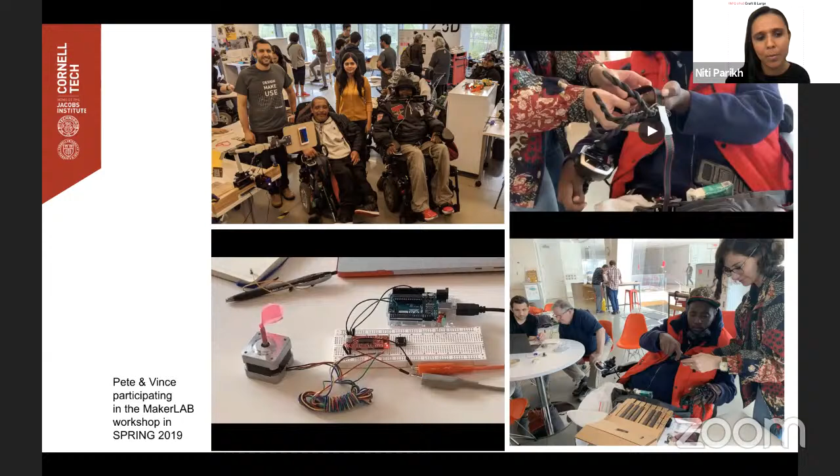This time I have about 5 Coler residents, 2 other Roosevelt Islanders, and 18 Cornell Tech students. These are some images from the past when I met Pete and Vince. They were part of my class in spring 2019, I believe.

Since then, I feel like it started to create that community of people who came through the Maker Lab. I saw them around the island, and then they introduced me to other people. It became this very symbiotic relationship where we had to continue this program in a way.

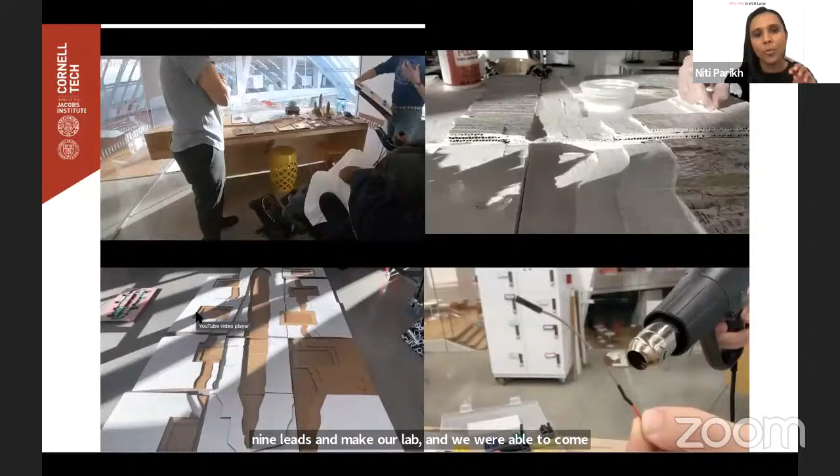We were able to create this vision of Vars, who is also a Coler resident and Open Doors member, who had done portraits of 8 of the Open Doors members. We wanted to tell a story, so there were these poetry pieces which were audios, and we were able to connect that all together.

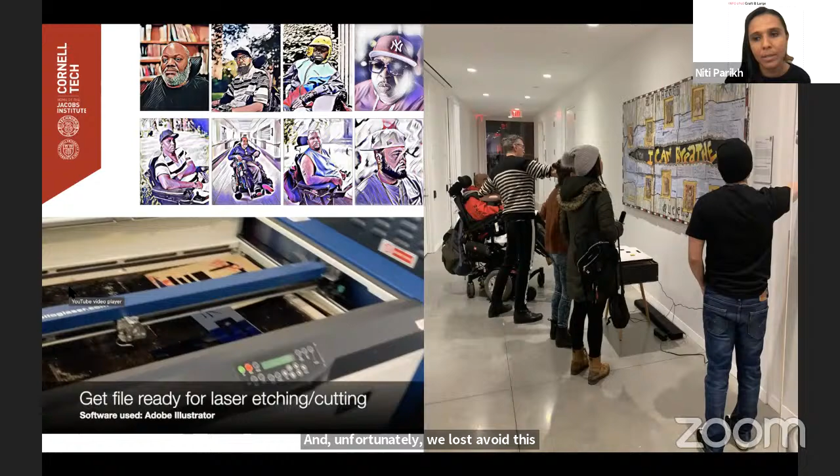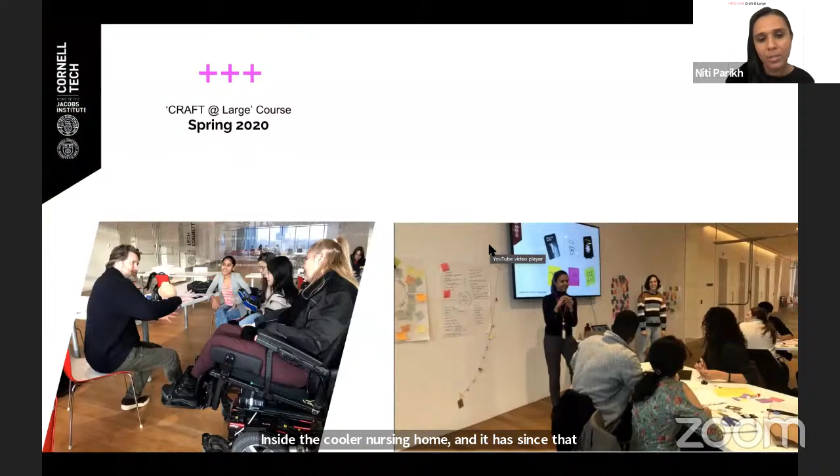I now am lucky to have this piece permanently placed outside the Maker Lab at Cornell Tech campus. I came to know all these eight members really well, and unfortunately we lost Roy during this horrible COVID pandemic. But this is something which I think, as an educator and designer, I have found really impactful for my students - having access to these creative minds inside Coler nursing home. It has since turned into something where every spring, fall, summer I meet more and more new people.

I met Shannon last year through this program and found out more about her. For fall 2020, we decided to do more of a virtual Skillshare where I was able to meet Francine and Emmanuel and Ms. Arceo, sharing their work with me. This has turned into a really great partnership, and I'm thankful for meeting these creative souls inside Coler. I hope we can continue this partnership with more support from inside and outside of Coler. This summer I will onboard one of the community members as a maker in residence in the Maker Lab, working with a full-time PhD student who has been awarded a PiTech Impact Fellow Award to work with me on a craft at large. I'm really looking forward to establishing strong long-term roots with my friends and colleagues at Coler.